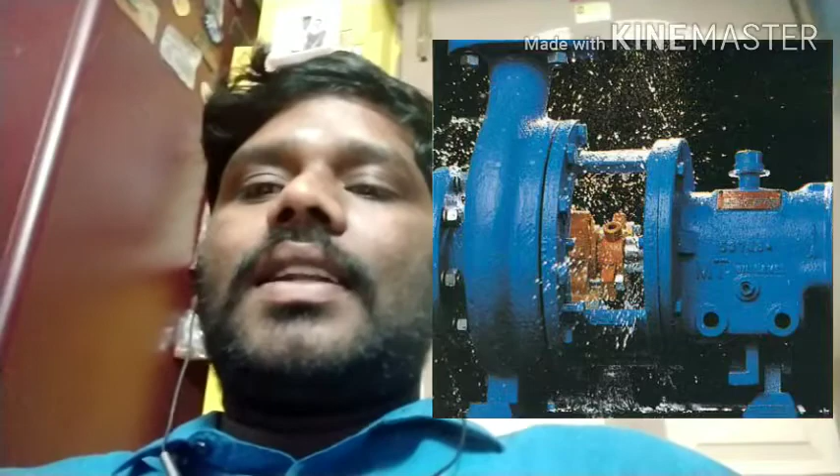Due to the direct coupling between the driven and prime mover, seals are coming. Like before, we used gland packing, then gland packing upgraded to mechanical seal. Even though we use these seals, a minor amount of leakage will happen due to improper maintenance.

But if we are handling hazardous chemicals, is that good? No. So developers came up with an idea of how we can develop the pump without a seal. That means if it's possible to develop the pump without seal, there is no leakage. That leads to the design of the magnetic coupling pump. I will explain it in 3D manner.

A magnetic coupling pump is simple, like either centrifugal or positive displacement. The working operation is normal. We need one driven and one drive force. It will rotate the impeller. Its centrifugal force impacts the liquid to convert it to velocity and then to pressure energy.

We'll dismantle this pump and look at it. What is there? Every pump must have the suction discharge flange. And this one specially has one cooling line also, which we'll look at later.

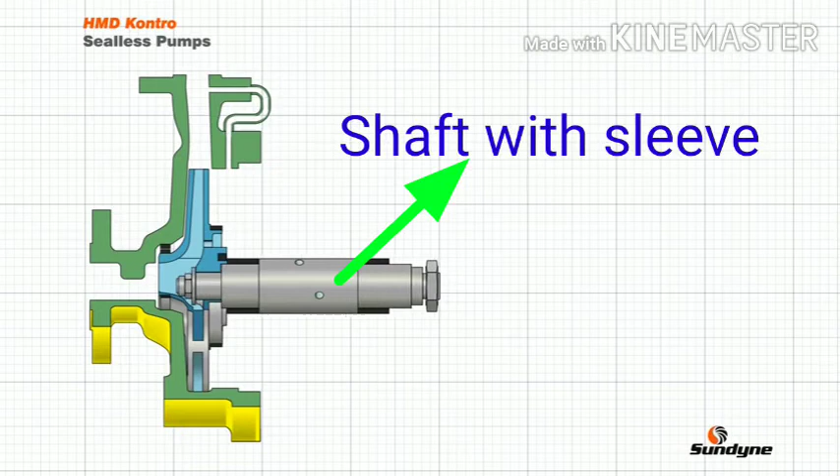The impeller needs to rotate to give centrifugal energy to the liquid to pass from one place to another. The impeller is connected with the rotor. Rotor means shaft with the sleeve. We have the bearing cover, which holds and supports the rotating shaft. Now the shaft is connected with the inner magnetic coupling. So when this coupling rotates, the shaft will rotate the centrifugal pump, that means the impeller.

All these spaces are in the pump. Now I am going to cover the whole structure with a containment shroud, which I will explain later. That means the entire structure is closed. This containment shroud is a static piece, it's not the rotating piece.

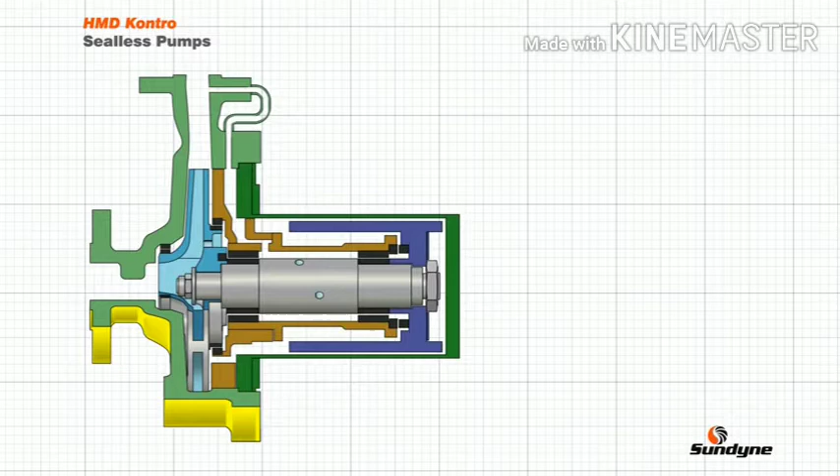It is between the inner and outer magnetic coupling, and it is non-corrosive. This is the outer magnetic coupling, connected with the prime mover shaft. This whole arrangement is completely covered with the coupling housing. There is no seal, and the outer magnetic coupling is connected with the motor.

When the liquid is filling, your impeller is rotating. It converts the energy, so liquid is passed from one place to other. But here's another thing: the liquid is going inside also. Why does the liquid need to go behind the impeller? For that we have to look specially at the coupling, how it is working.

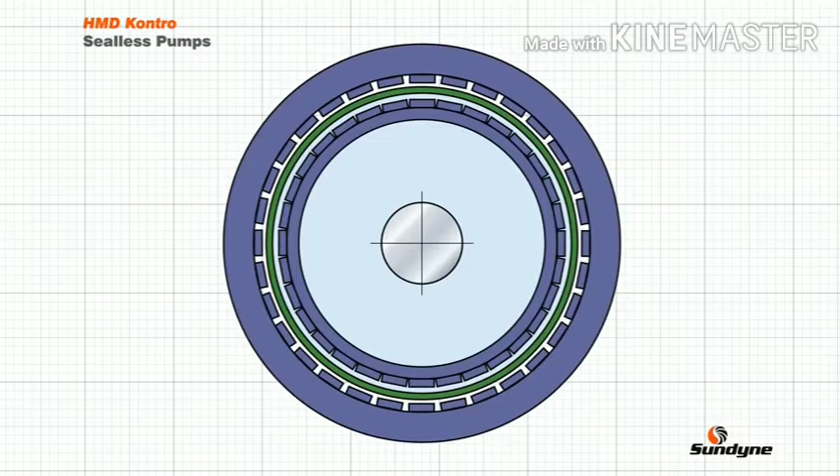Here I am going to demonstrate the inner and outer coupling, that is inner magnet and outer magnet coupling. In between we have the containment shield, that green color. Inner and outer coupling have permanent magnets. So when the outside one is rotating, due to the magnetic lock between these two, it gets locked and rotates the inner one at the same speed.

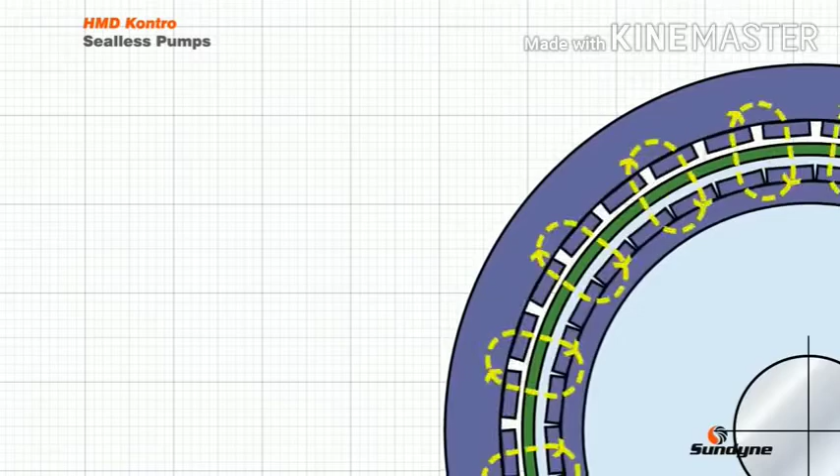But due to the containment shroud, it is a metallic shield, a pure metallic shield, meaning electrical conductivity is there. So eddy current is forming due to this magnetic field. The eddy current makes that area become very hot due to energy conversion. So we need to remove that heat.

For that purpose, we use the processing liquid. So when I am pumping the liquid, this processing liquid comes into the structure and cools the bearing also. The bearing may be silicon carbide, and after that it takes the heat away from the containment shroud, and once the heat is eliminated, the whole structure will run for a long time.

The only monitoring needed for this pump, not really maintenance, is to make sure there is no heat development inside the housing. For that, instrumentation is used to continuously monitor the temperature. The main problem only occurs if there is cavitation, vapor will form. That vapor is not good for heat conduction.